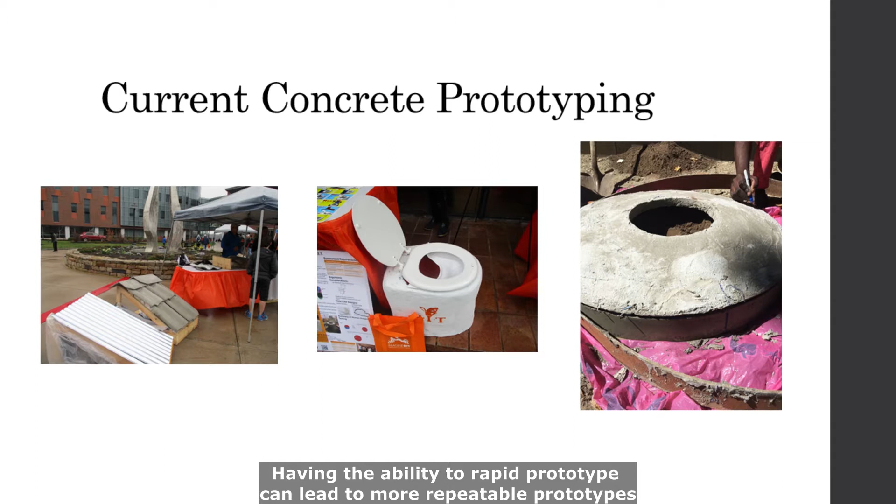Many senior design projects have the desire to make prototypes out of concrete. However, traditional methods of using wooden molds are extremely expensive and time-consuming, as the mold is often destroyed in the creation of a single prototype. Having the ability to rapid prototype can lead to more repeatable prototypes that take less time and are less expensive.

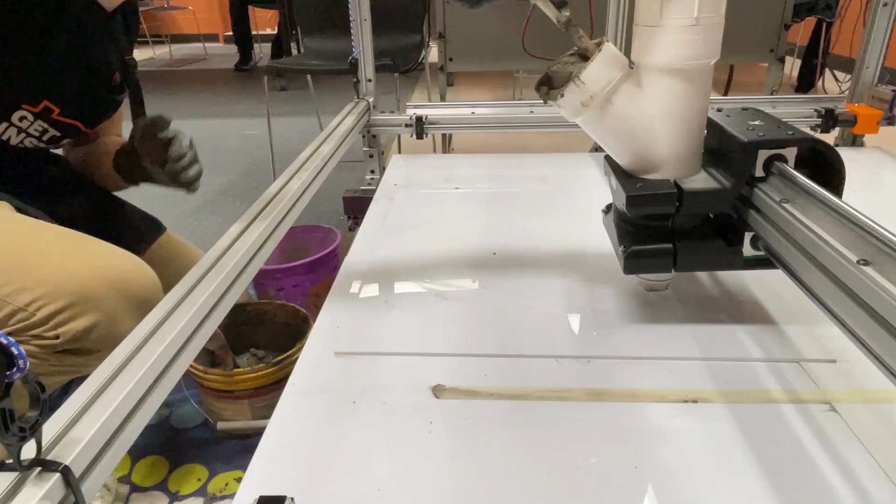This is the third iteration of the printer's design. The printer had two main issues our team was set to address. The first issue was XYZ movement for the printer. Motors in the Z direction were binding and the movement was unreliable. The other issue was the failure to reliably deliver concrete to the print head. There was no system in place to pour concrete and have it print out the nozzle. The previous solution was to directly feed concrete in the nozzle by hand, which is not sustainable.

In addition, we were tasked to integrate a slicer to 3D print custom parts.

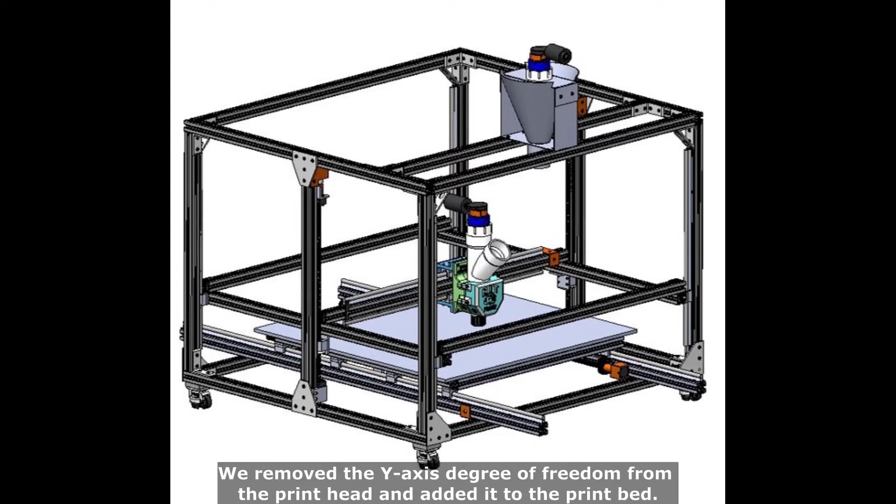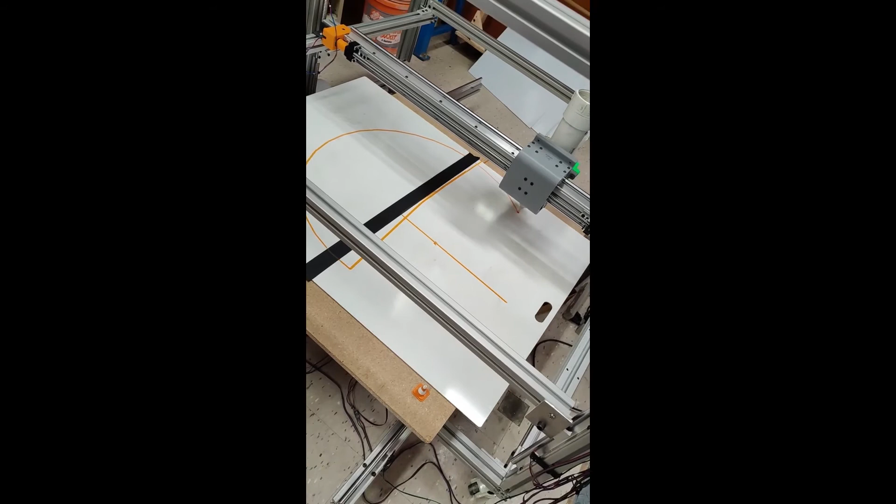For the motion system, our Cartesian coordinate system is used. We removed the y-axis degree of freedom from the print head and added it to the print bed. This was done to reduce the range that the concrete delivery tube needs to reach, and also increase the stability of the print head gantry. When moving the y-axis to the print bed, we had to replace the stepper motors with geared versions so that they could move the extra weight of the print bed and the concrete. The stepper motors that drive the movement system are connected to the Duet 3D controller board.

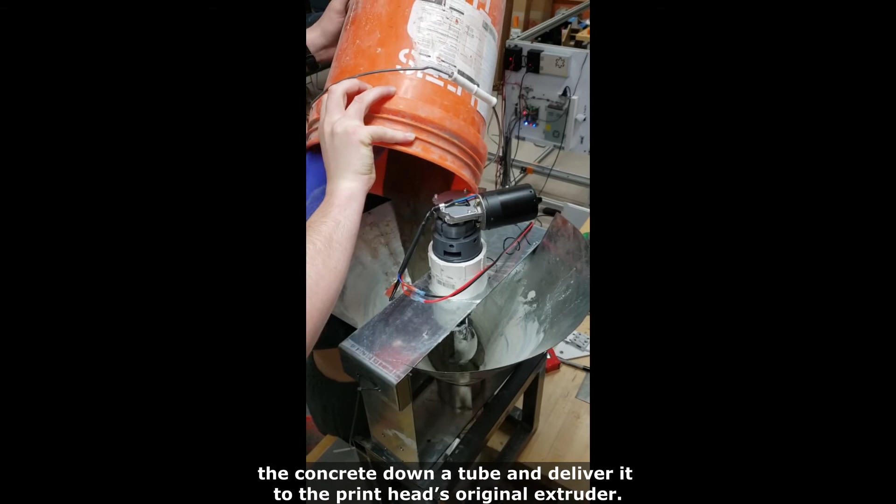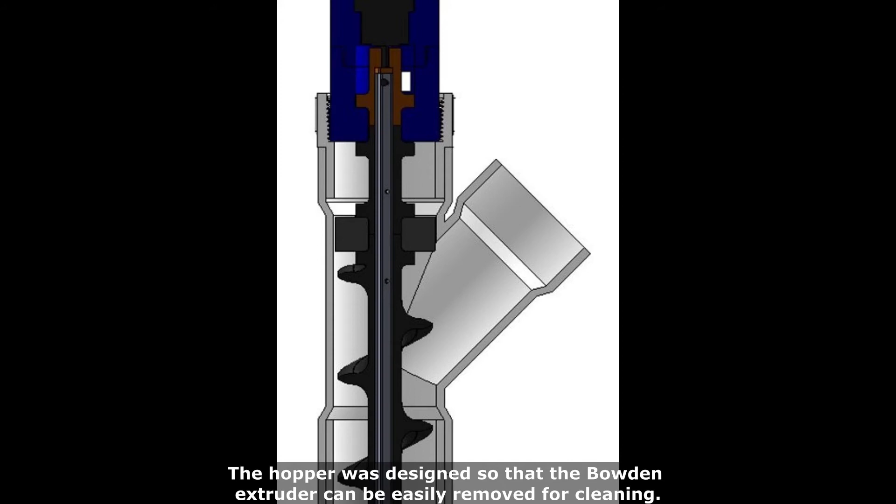For the concrete delivery system, we expanded upon the direct extruder system from the previous team by adding a Bowden extruder at the hopper. This extra extruder is there to keep the concrete mixed and to help push the concrete down a tube and deliver it to the print head's original extruder. Both of these consist of DC motors connected to 3D printed augers, which push the concrete down. The hopper was designed so that the Bowden extruder can be easily removed for cleaning. The motors are controlled by dedicated motor controllers, which take in input PWM signals from the Duet board.

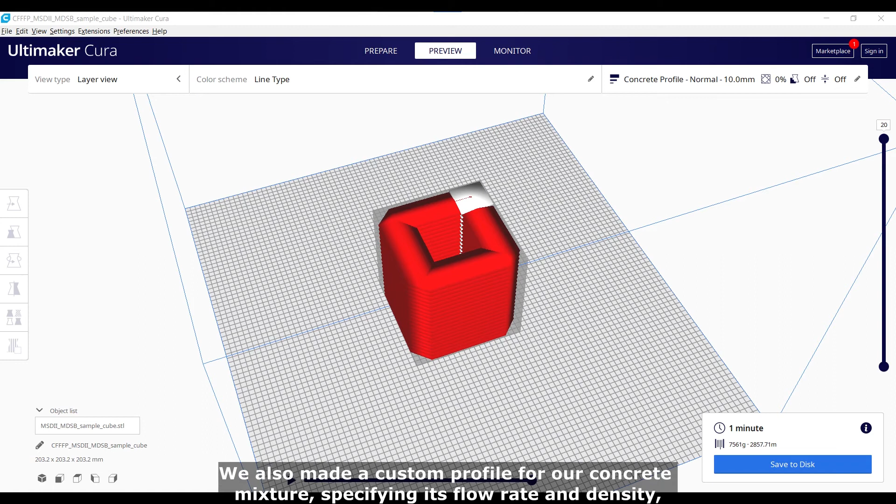For the slicing solution, we use the Cura slicer. The slicer produces G-code that can be uploaded to the Duet web interface, which is how users interact with the printer. We created a custom profile for our printer. We also made a custom profile for our concrete mixture, specifying its flow rate and density, and a third custom profile for the printing information, calibrating settings like layer height and printer speeds. The Duet web interface allows the user to manually control the printer, as well as start and stop prints.